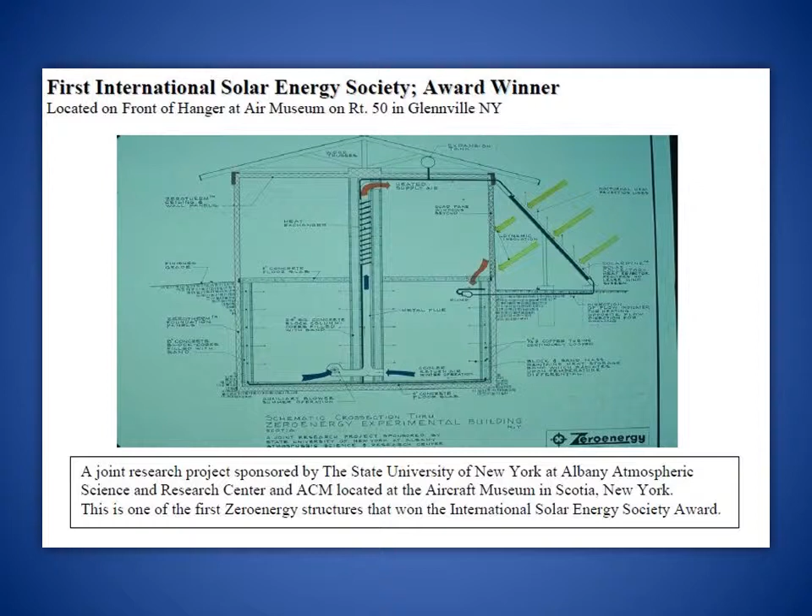One of the most important things you could do in your home and your business is to change all your incandescent lights, from the 75, 100 to 75 to 60, 40 watts, down to LED. What we had done in the past is change the incandescents to the fluorescent lights, but that was about 50, 55% efficient. Now you could change the 75 watt down to an 11 watt LED. And LED bulbs are going to be the wave of the future, and we're going to change everything to LED.

The only way you could get a house to be net zero is not only to reduce the kilowatt hours, but also the BTU. We have done it through conservation in this building. Now, what we need is one of the forms of renewable alternative fuel, and one is the solar hot water system. So we have the solar hot water system that takes care of a little bit of heat that we need, and also the hot water.